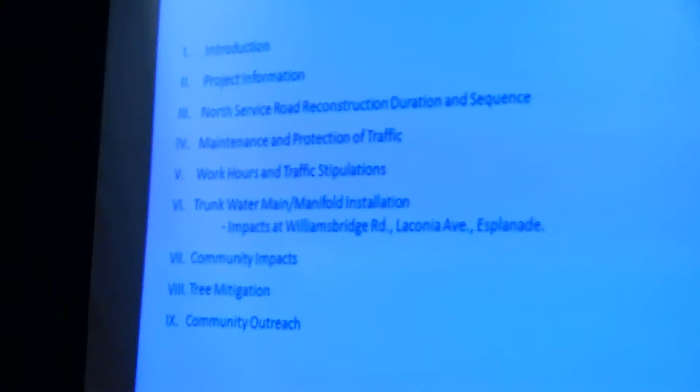All right, so I'm not going to read everything, but this is the agenda. There's going to be an introduction. I'm going to go over the project, the service road, the sequence, and so on. That slide is basically self-explanatory in terms of the agenda. I'll just get right into it.

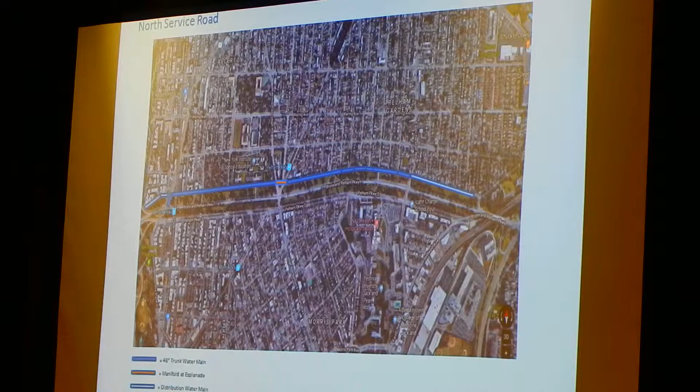But essentially, this is the project area in terms of the North Service Road work. The locations between Bronx Park East and Stillwell Avenue, including a portion of Boston Road. Side streets—essentially every side street within that stretch will be touched in some way. For the most part, the way we'll be touching those blocks will be to tie in the new water main that's installed, or the new sewer that's installed, or to also tie in the new bits of roadway that we're going to be doing as well.

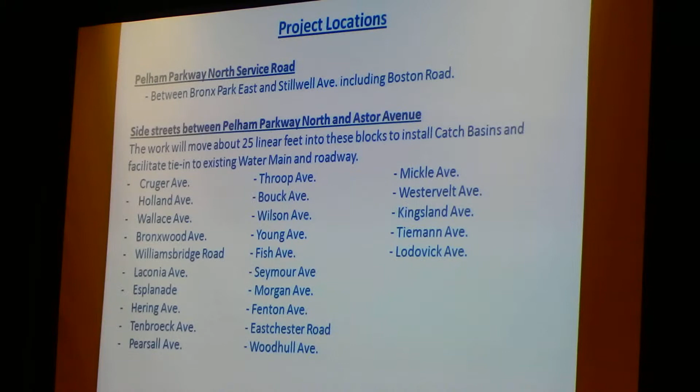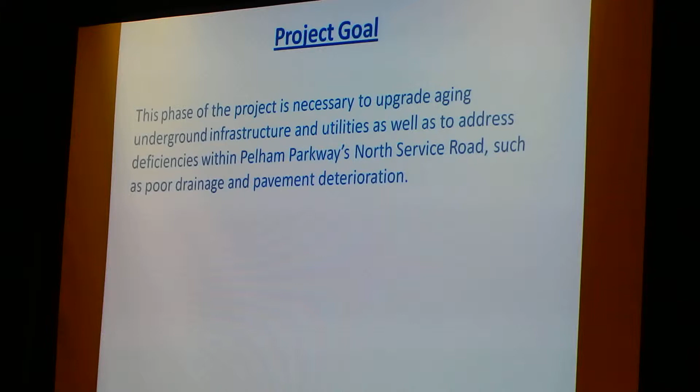Okay, the goal. This phase of the project is necessary to upgrade underground infrastructure and utilities, as well as to address deficiencies within Pelham Parkway's North Service Road, such as poor drainage and pavement deterioration.

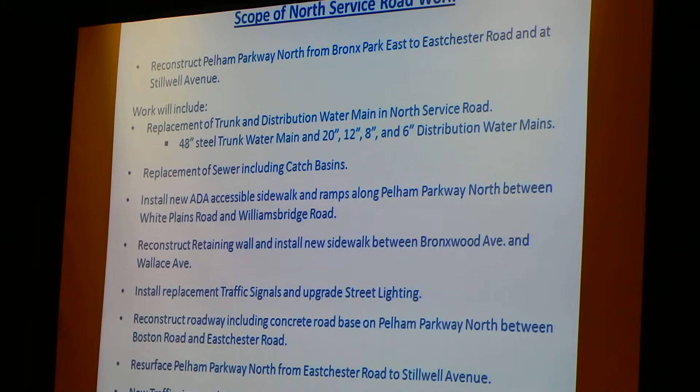Okay, scope of the North Service Road work. So we're going to reconstruct Pelham Parkway North, as I said, from Bronx Park East to Eastchester Road, and we'll be reconstructing Stillwell Avenue as well. Let me just say that there are points in this presentation where it will be redundant, so bear with me.

So this work will include, and most notably—this is a stark difference from what happened on the south side—we're going to be installing a water main. In this particular phase, we're going to be installing a 48-inch steel trunk water main. It's a very large pipe that is going to be going in within the roadway on the North Service Road. This particular bit of construction is probably going to be the most impactful to the community.

We're also going to be installing distribution water main: 20-inch, 12-inch, 8-inch, and 6-inch. Let me make the distinction: the 48-inch trunk mains are very large pipes that feed the distribution mains. These trunk mains bring water in; they're connected directly to the water tunnels that bring in water from upstate, and they connect to the smaller distribution mains that bring water right into your home.

We're going to be replacing some sections of sewer with catch basins, a new ADA accessible sidewalk and ramps along Pelham Parkway North between White Plains Road and Williamsbridge Road. So on the south side of the North Service Road, there will be a sidewalk. Essentially, where there is parking allowed on the North Service Road at this point, there will be a sidewalk installed. So from White Plains Road to Williamsbridge Road, there will be a sidewalk. Eastchester to Stillwell will remain the same, the way it is right now.

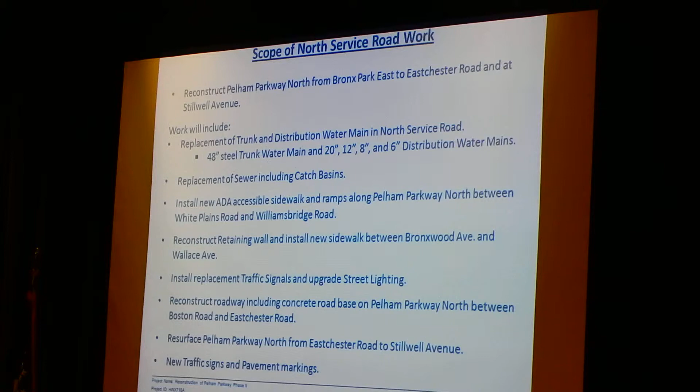We're also going to be resurfacing Pelham Parkway North between Eastchester Road and Stillwell. So we're just going to be repaving it, it won't be a full rebuild of the roadway. There will be new traffic signs and pavement markings.

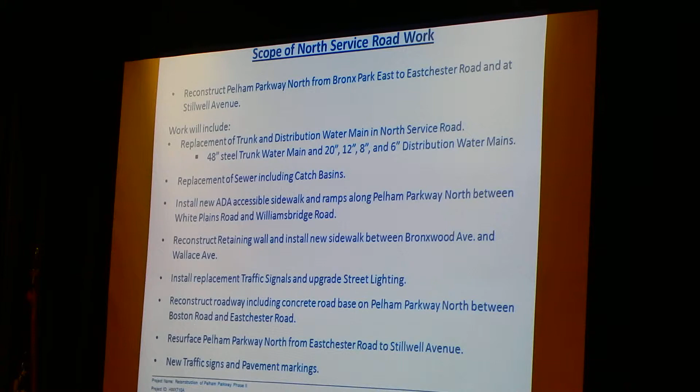The preliminary work right now involves outreach on the North Service Road, where the contractor already has storage areas set up within the area for the main road construction. As needed, they'll set up storage areas on the North Service Road for their pipes and other materials.

We've already begun installation of tree protection, tree pruning, and removal. They're going to be installing tree barriers around trees that will be at risk, to make sure those trees are protected as construction comes through, and to make the area ready for the machines that will come in with very tall booms.

There's going to be tree pruning, so they'll prune back some trees so they aren't damaged. There will be some removals, and we've already discussed those with the Pelham Parkway Preservation Alliance and the task force. Only a few trees will be impacted, located in the Bronxwood area, about 3 or 4 trees that we discussed.

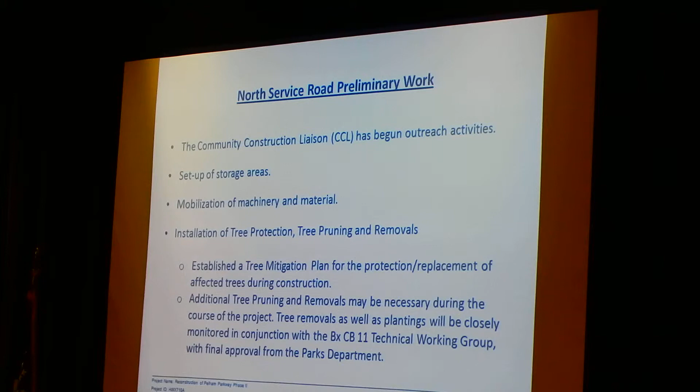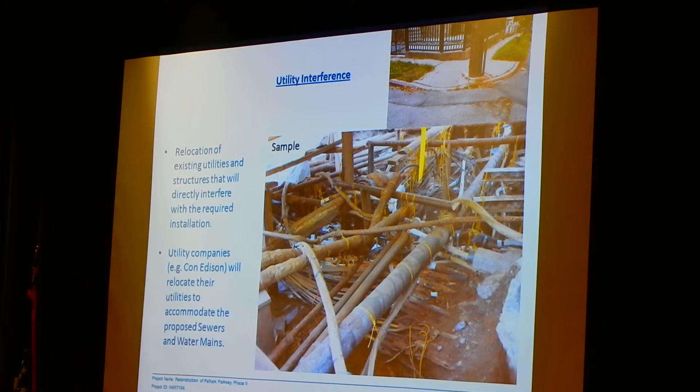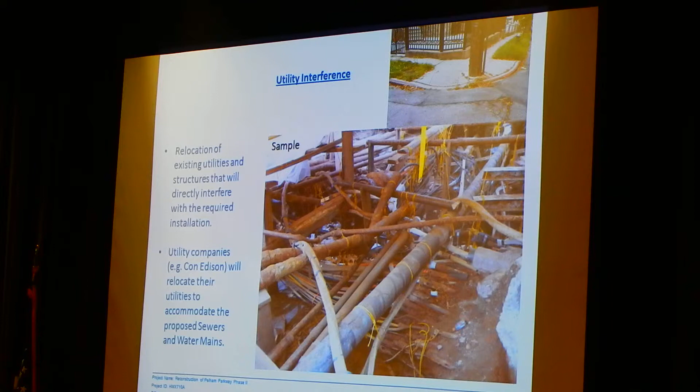There's utility interference currently on the service road between Stillwell Avenue and Eastchester, where gas main relocation work is happening. I want to make it clear that work is on behalf of Con Edison. Although it's the same contractor doing the work, they made a separate agreement with Con Edison to perform it, so it's still a Con Edison operation despite being done by our contractor.

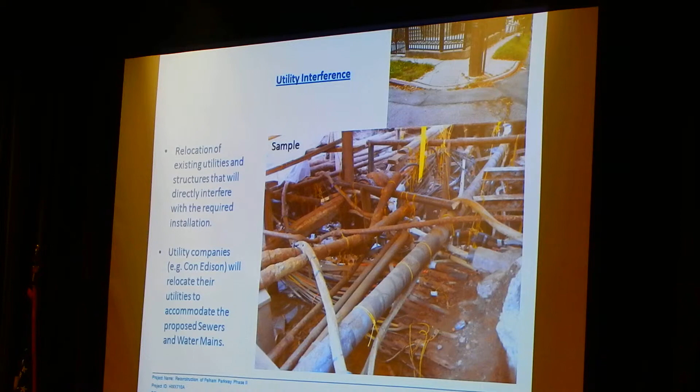These pictures represent how utilities can interfere. The one on the bottom is a sample of the type of interference that can be encountered, in Manhattan, where there's a lot of infrastructure underneath that has to be maneuvered around. In our area, you'll see utility poles that represent interference, and we'll work around them as needed.

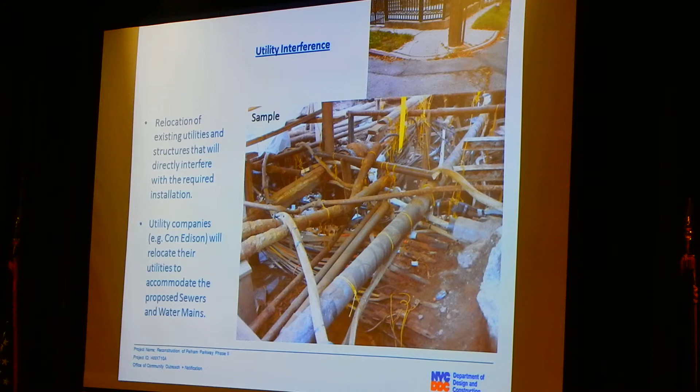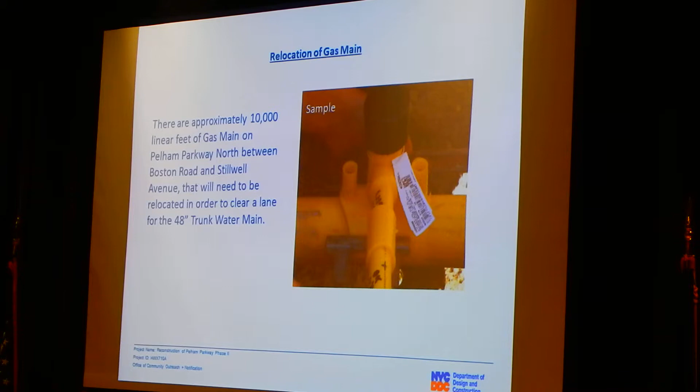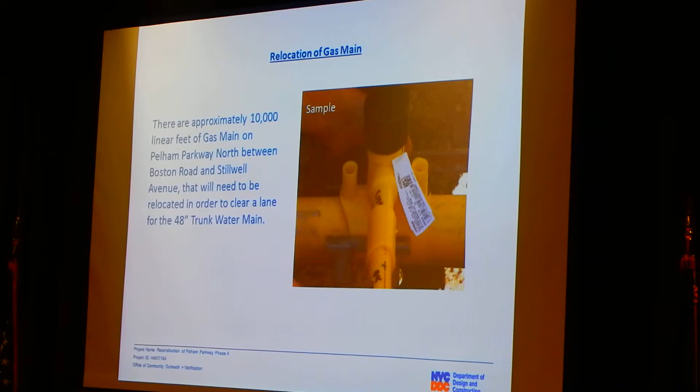As for relocation of the gas main, there's about 10,000 linear feet that needs to be relocated before our trunk main can be installed. Once the crew finishes their work between Stillwell and Eastchester on the service road, that work will continue traveling west from Eastchester on up the line.

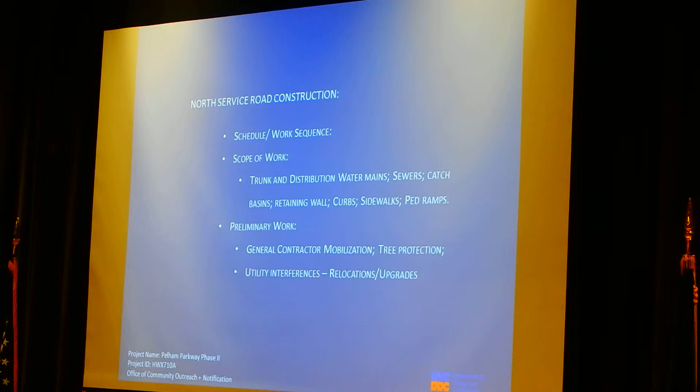North Service Road construction, again, it's repetitive. I'm going to go over the work sequence, the scope, and preliminary work, similar to what I already touched on, along with the North Service Road schedule and work sequence.

The anticipated North Service Road reconstruction schedule runs from right now through summer of 2021. I should mention summer 2021 is the official end date of this project. Unofficially, there have been delays impacting the project, including delays with permits, permit distribution, and the presence of bedrock.

We are in the Bronx, and unlike the other boroughs, being the only one physically connected to the continent, there is a lot of bedrock, so you can expect to hear rocks being excavated along the service road. That rock excavation and removal will probably begin within the next couple of weeks, moving from east to west as needed, since they want to remove the rock before installing the water main.

I wanted to touch on the fact that the official end date is summer 2021, but presently, with current delays, we are looking at spring 2023 as the possible new end date. The contractor is researching ways to accelerate the project.

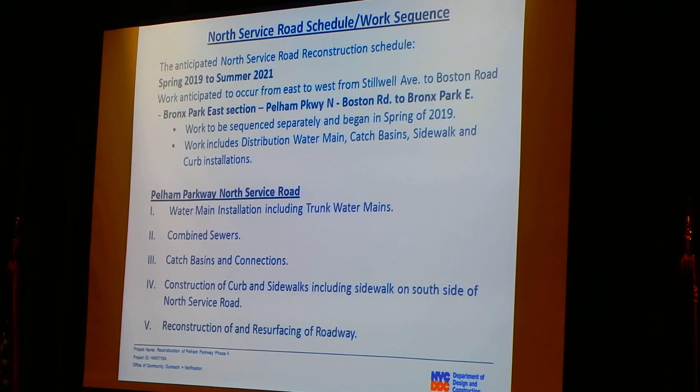From this point forward, the contractor will look to complete the Bronx Park East section with catch basin installation, sidewalk, and curbs. There'll also be some additional utility relocations over there as well, and I'll touch on when that work will end in a few moments. As for the sequence of the work, we'll do the water main first, including the trunk water main, and then we will do sewer.